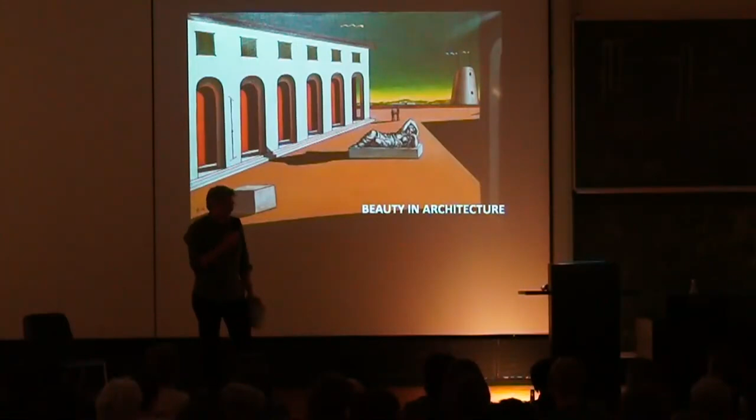Ich habe meine Brille vergessen, also wenn ich meine Sonnenbrille aufsetze, ist das nicht, um irgendwie gesehen zu werden, sondern um euch zu sehen.

Beauty, it's not an easy theme to receive. I don't know how that is in your case, but when I studied, the word beauty was actually never used. Everybody thought about it, but nobody was daring to say anything about it or use it as any measure for judgment. I think that's a bit the issue with us architects - we hardly talk about it. So I will try to talk about it. I already investigated, just half an hour before I started, what the idea behind this theme was, because I was wondering: is it the idea that whatever I did in this project, I should say I thought it was ugly at the end, or not?

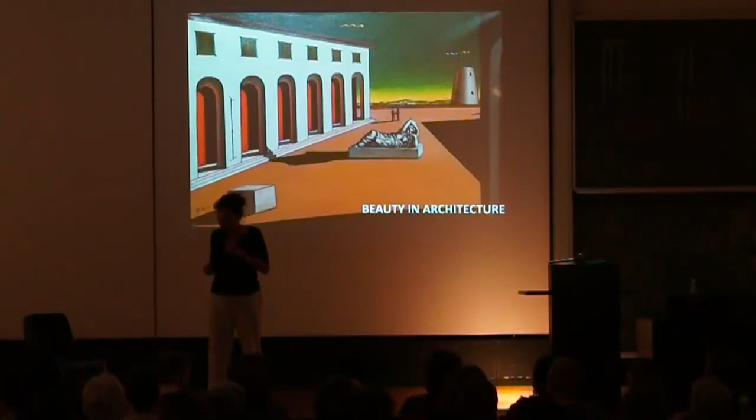So anyway, we will see. I will give my view on beauty. But most importantly, it's not so easy to come to beauty in architecture, if it is at all beauty - that I leave to you as a judge.

Okay, let's start. This is a definition from Corbusier, and I think it's quite striking. He was Swiss, but everybody thought he was French. The thing is, you employ stone, wood, and concrete, you build houses and palaces - that is construction, ingenuity at work. But suddenly, you touch my heart, you do me good, I'm happy, and I say this is beautiful. That is architecture. Art enters in.

So I think what's important here is that when we talk about beauty, we talk about emotion. And it's very difficult to grasp and describe what that emotion is. I think this is what it is for me.

When you look a little further, in the last 10 years, suddenly beauty becomes a theme in architectural education, and all kinds of people try to give a definition of it. It's about harmony and function, but we all know that. At the end, it never touches the core of what beauty is, and that, I think, is the innovation - because what it says here says a lot, but it doesn't talk about emotion.

Anyway, I'll skip that. So what is beauty? And who decides what beauty is? That is actually what I want to talk about today.

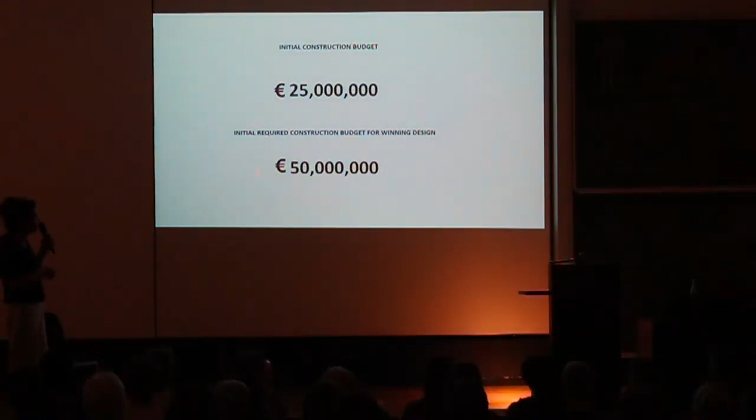But it started already off in a very difficult way with this. Budget was 25 million, and we all knew that the building would cost 50 million. So the amount of discussions we had with the client about money was insane.

And this client was also the user of the building. So whatever proposal we made for cost savings, they said, no, we want to keep that, we want to keep that, we want to keep that. So at the end of the day, we didn't save any costs, we ended up a bit higher.

But a cheap building. Our client was a pianist, Pedro Burmester, and he stopped being a musician at that time, and wanted to dedicate all his energy to this building, not only in designing it, but also programming it. He really wanted to make it a building that is all about music, as many types of music as possible, for everybody in Porto.

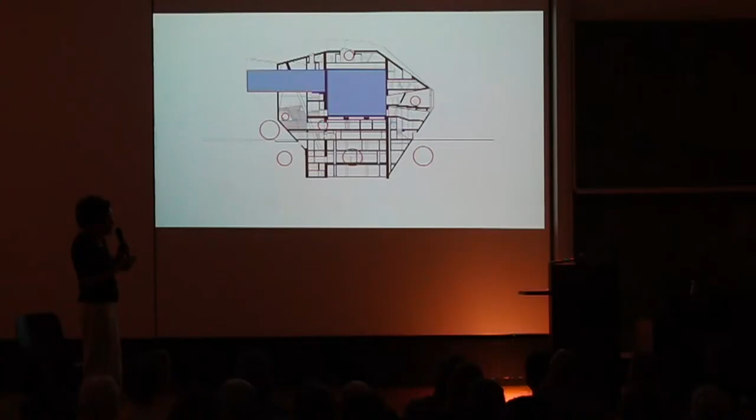And you see this in plans, so these are all the different plans of the project with the large and the small auditorium, with all kinds of areas around.

And then all these areas would be connected with a loop that basically takes you from the entrance all the way around, where you pass all the rooms and then you can come out of the building.

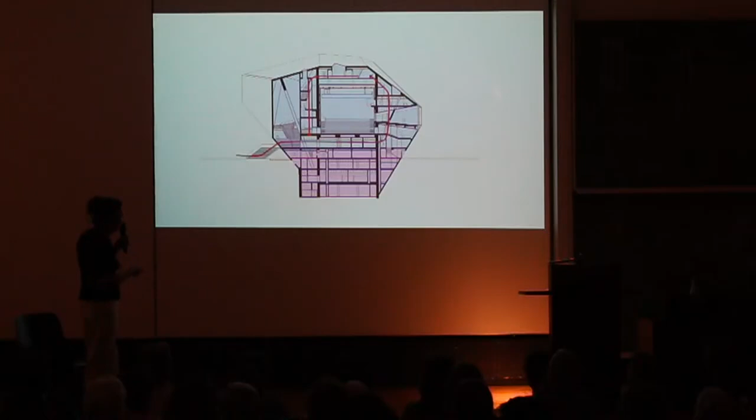This is the model, and at this time, there was no 3D. Well, not really. We had one computer guy who made us the shell, and then we cut it one meter above floor level, so we knew what the outside of the building was. That was about all of it.

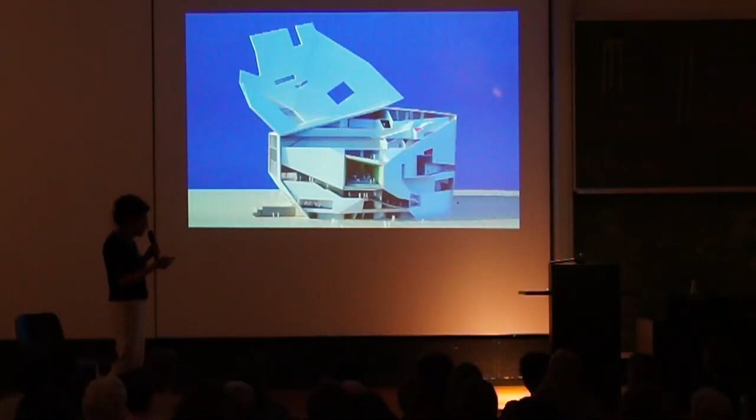But as you can see, these kinds of spaces, routings and rooms, are all in different shapes that we all had to calculate or figure out in the model how that would work, and later on translate that into construction. And then construction, the concrete, was a big task.

And of course, we came up with this kind of totally crazy idea. We were so obsessed with geometry that we unfolded the whole building like this. We put one grid over it and then folded it back together. And that was the pattern of the concrete.

But then the contractor came on board, and this was, of course, a nightmare for him because he pours horizontally, not in angles. So we had endless long discussions, but I thought at any point the client would tell us, 'You're totally crazy, we're not going to do it, we're just going to make the pattern horizontally, and that's the end of it.' But they didn't. They executed it like that.

By the time we finished the concrete sculpture, the client was very enthusiastic.

There were no windows in the building, and they already wanted to do a concert. So they did the concert in the main hall, and afterward they said, 'The acoustics are wonderful.' And I was like, 'There are no windows, there's no walls.' But anyway, they got really into it.

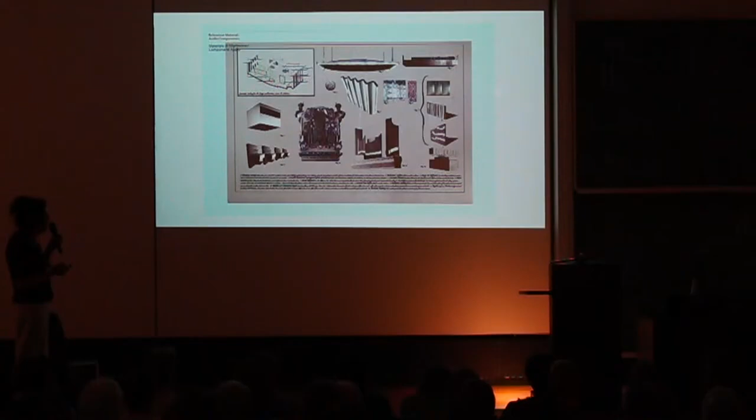This is the menu of ingredients that we all designed. We started with the corrugated ones. We wanted these windows, but for acoustics it couldn't be flat, so that's why we came up with the idea to corrugate the glass like this.

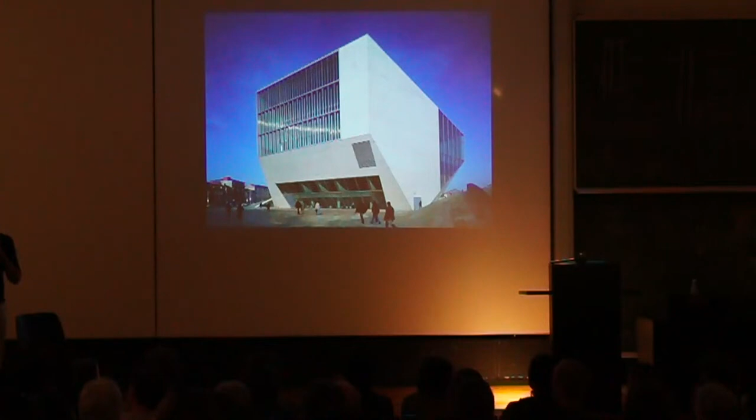And because it's corrugated, it's quite strong, so you could actually have 5 meters in one go. It was an interesting way of looking at glass. Here you see the inside of the hall with gold patterned walls, and at the end you see the corrugated glass.

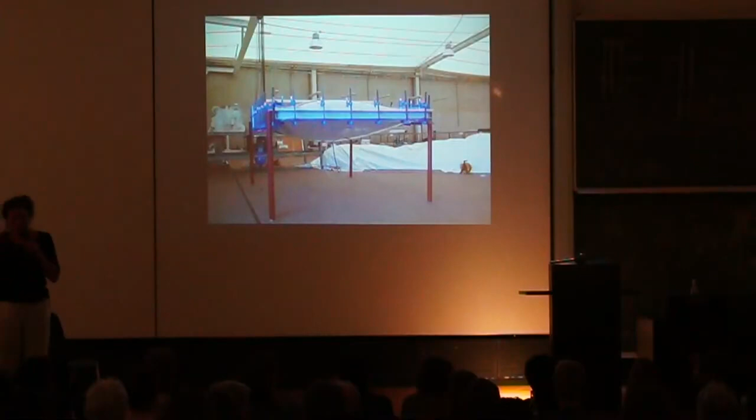Now I'm going to talk a bit in terms of beauty. What I think was very nice about this hall is that it doesn't give you a clear view into the auditorium, but it gives you a hint. These are, for me, poetic moments - you can see a bit in, but not quite. Then you see the layering of all the spaces and areas behind.

This is where I get enthusiastic. The canopy, as you can see, was a big pillow - we had to make a big pillow above the stage for the reflection of the sound.

At the end, we designed this hall with 2 organs because that's what the client wanted. But it turned out organs were really expensive. At a certain point during construction, they said we can't afford organs. So we ran into a bit of trouble because organs were actually quite important for the acoustics too, and we also considered ourselves not the best organ designers.

So what we did was just steal through 2 designs of existing organs. This one is from Bilbao, this one we found somewhere in Mexico, and this was just made for us. So they're both fake, as you can see.

And then, of course, the seats and the curtains were designed. It's incredible how much design work was put into this building, especially looking back at it now. The curtain also had this idea of putting a kind of veil - so you see it, but not quite. It's all about illusion, and I think that's the nice part about this building.

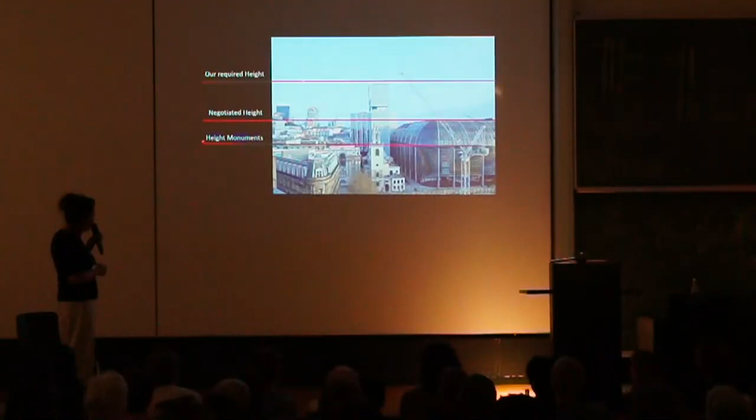And of course, the task was to earn money. These were bankers—they grew from a small organization into a very large one, housed in different buildings. They basically asked us to make the building as big as possible and make sure everyone fit. That was the task. The lower line here is the bottom line, and we are up there, so there was quite some discussion with the city to get it up there and create this volume. That process was very, very intense.

We had a meeting with the city architects. I remember the first meeting we had—we went with the project manager and with Rothschild. And that meeting went totally wrong.

The city architect got really annoyed and said, okay, go back, I don't want to see this anymore, this is enough. So the next day we talked to the client and said maybe it's better you don't go with us, we go alone. That is better for the atmosphere. They were okay with that, but it was a long process, really a very long process, getting to a design solution that the city architects could approve, because the location was so sensitive.

So at the end, it became a cube with annex, as you can see here. That was actually, at the end, the building.

As you can see, here we broke it down. We had a quite efficient cube because they needed lots of office space, but here you see the annexes and the little mansion with a historical Wren church in the back. But this building is not very visible, as you can see, because the distance to the neighboring buildings is around 3 meters, so there are all very narrow alleys.

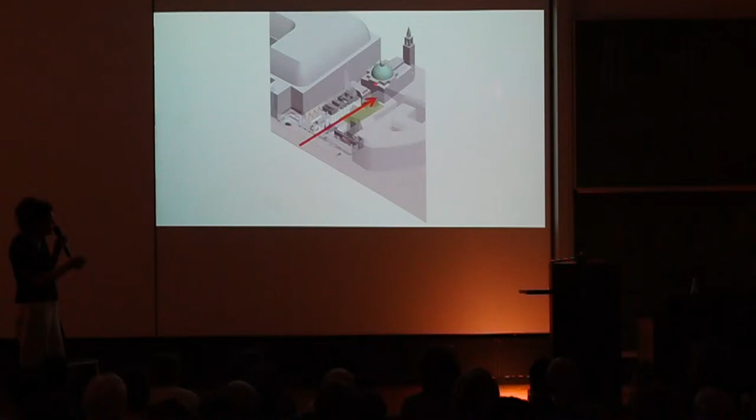And here you see that. So here you see then that the whole ground floor is opened. There's the little graveyard of the church and the church behind. The idea was then actually to do this - so this is all open. This narrow alley of 3.5 meters is actually widened completely up and was reconnected again to the stair, with the church on one side, the lobby, and on the right side the archive, which I will show later.

And this is what you can see, so this is the building. It was very important for the city architect to find the street edge, of course, so that's why we took these columns down. But it also created a beautiful screen between the public space and the more private area.

Then the finishes - they had an enormous archive from the Japanese emperor 200 years ago, these kind of things. You could say it was also enormous what we found. They had old books, an old archive from Russia, etc. And this history, we had to combine with this building in some way. So we actually wanted to go from this to something a bit more modern, which was really the hardest part of the whole design process in this building.

So what we tried to do, we took actually some art paintings - this is Nathan Rothschild, the brother who was sent, the son that was sent to London. We actually manipulated all these known historical pictures into materials and applied that in the building. That was the idea. And on top of that, of course, we had also a lot of other things - paintings, gifts, gobelins, all kinds of things, which were actually mostly housed in the archive, but was never seen by anybody else.

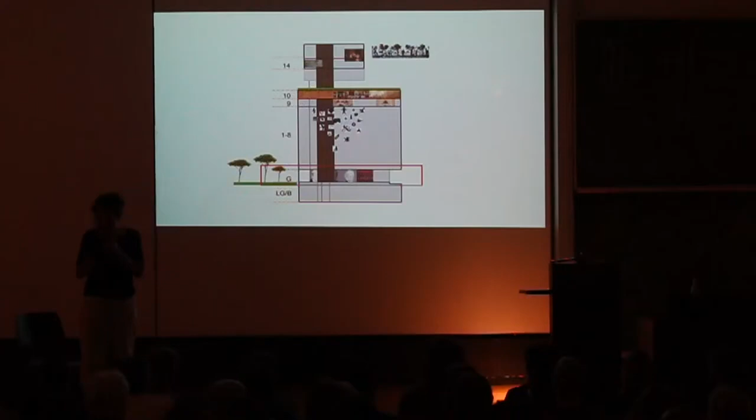That was good. But of course, this space and all the special spaces, we want and not leave it to this interior architect. So that's why we made a proposal for this area and for the mansion. We thought we're going to sprinkle a little bit of heritage in the design of the other interior architect. But anyway, that collaboration was really nice, to the point that I never entered those levels because it's just terrible.

Here's some pictures of how it looks. So here we are, just behind this car on the street. You see the lobby is slightly lifted above the street level, which gives really some privacy on the public street. And that looks really, really well. On the left side, the lobby, and on the right side, you have the archive. And as you can see here through, here's the church.

Of course, the transparency was a problem for the bankers, because in the old building, you could not see anything. They had glass, but there were everywhere curtains, and you were actually not able to see anything. Everything was a bit secretly what's happening behind the doors. So we came up with this kind of big glass lobby, so they were a bit like, really? Do we really have to be seen?

That's why this curtain was designed, not as a kind of solid view barrier, but more as we did in Casa da Música, a kind of screen where you can still see some shades, but not quite clear what is happening there. With on the other side, the archive. And here we printed the heads of the 5 brothers on the glass.

And then inside, we really went very traditional. Of course, we had to hang these paintings somewhere. So this was our design. We envisioned actually quite a historical library with a lot of books on top, and with these paintings combined on the table. Now, how does this look?

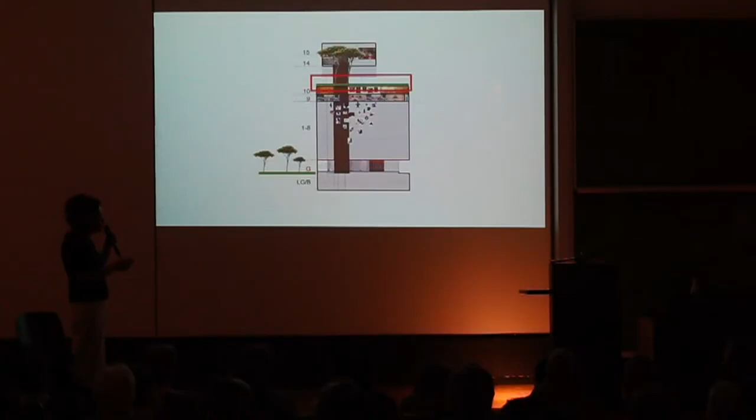And that worked, so since then we were able to make the room. Now, we did an old thing, I'll skip that for the moment. And then, of course, there was the roof terrace, because they had never had any exterior space. This was, of course, a beautiful space. And of course, also here, we dwelt a bit on the mansions that they owned, etc. This is one of the images of the mansion they own, with all kinds of very British historical pattern, bushes, very sharp grass, how the Brits are.

And then, of course, during the whole design, the most discussion was about meeting rooms. We don't have enough meeting rooms. So at a certain point, I thought, why don't we make meeting rooms on the roof? So we actually made these, they're all meeting rooms. You can book the meeting room on the roof and then have lunch there. That was the whole idea.

And here you see how it actually looked just after opening. What is not so nice about this is apparently David had vertigo issues. So we had nice handrails, you have a beautiful view of the city, but actually that scared the hell out of him. So they planted bushes all over to block the panorama. Anyway, recently they've been removed again, so you can see a bit more, but that is how things sometimes can totally go wrong in your design.

So who decided what beauty is? Yeah, that's a difficult one. I can tell you, it was really one of the most complicated projects I ever did, because we wanted to be modern, they wanted to be conservative. Actually, it takes so much effort. We had to make samples, we had to make ten proposals for everything. We needed actually two years together so that they could get used to us and we get used to them. And at the end of the day, I think we got to a kind of design language that we both liked.

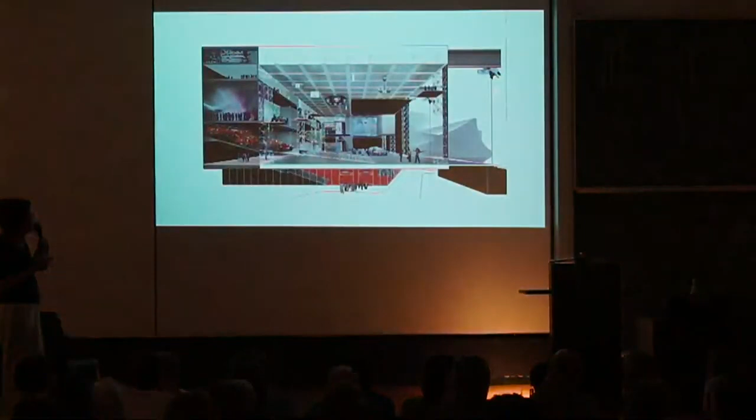And it was our sketch on the building, a kind of box, multifunctional box, almost like a warehouse where on the scene you can build whatever, and actually you could do whatever you want in that space. This was our competition entry. The building at the end looks very different - I will tell you later on.

And this is actually, it's a very simple concept. It's a flexible space - a space of 80 by 40 meters by 20 meters high, and a fixed auditorium. These are the two components, and they actually make the building.

For the flexible box, these were the collages we made for the competition. Of course, you can imagine there we can do so many things. So this idea was that you would have 3D performance all around the walls, but then the performance would not move, but the public would just move and go from one performance to another. Or a big making space where you could actually make a huge art piece all together as a kind of performance experience within the city. Or 3D cinema or an art fair.

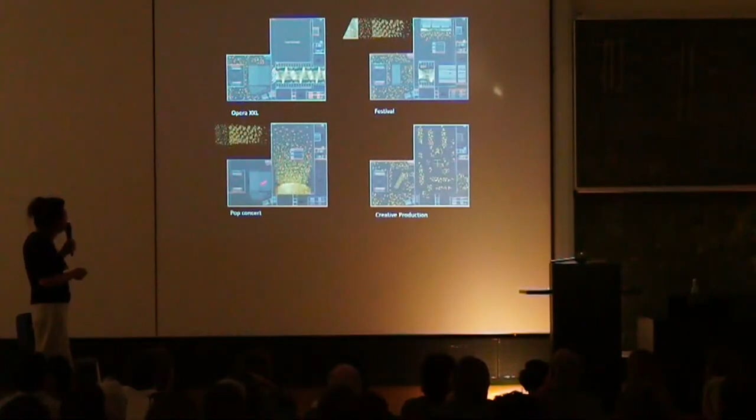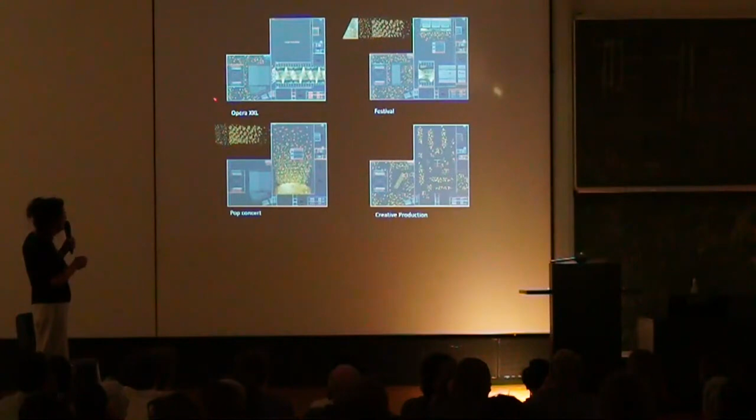And of course, this was all about flexibility. So we had to make many diagrams on what you could also do. Of course, the main obvious one is in the main hall, you do a big gig for 5,000 people and you use the theater separately. Of course, there's lots of in between - so here is a kind of, let's say, here the whole building is used, here also, and here it's separate, and here the auditorium, for example, takes over the warehouse. And then, of course, you can imagine you have 100 variations in between.

But with this idea, we won the competition, because this was the warehouse and this was the theater. And we said, with this composition of the two volumes, you can do an opera XXL. And this is how it looks.

So the stage could be in the theater, but by opening doors here, the stage could also be here. That meant you could make a stage about 50 meters deep. Our big example was a performance of 50 meters deep, where you have real perspective. At the end of the stage, we made a big door, so you can imagine after the performance is finished, the actors opening the door and walking away into the theater.